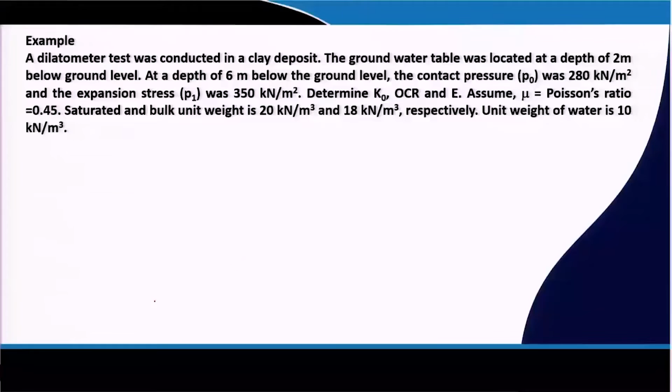So, last class I discussed the pressure meter test and dilatometer test. Now, this class first I will solve one example problem related to the dilatometer test, then I will discuss the other in situ test. A dilatometer test was conducted in a clay deposit.

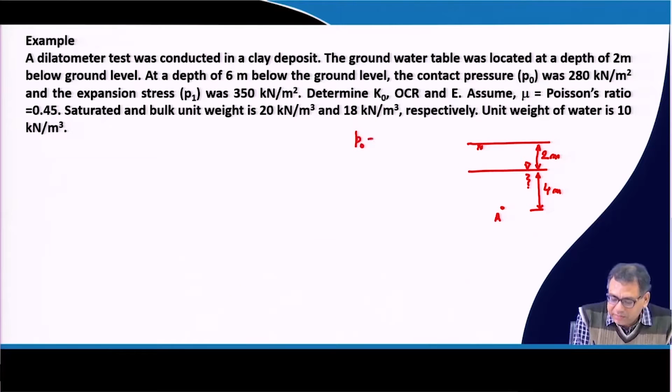Here P0 is given as 280 kilonewton per meter square and P1 is given as 350 kilonewton per meter square. Poisson ratio of the soil is 0.45, saturated unit weight gamma sat is 20 kilonewton per meter cube and gamma bulk is 18 kilonewton per meter cube. That means below the water is gamma sat and above the water is gamma bulk. Unit weight of water is taken as 10 kilonewton per meter cube.

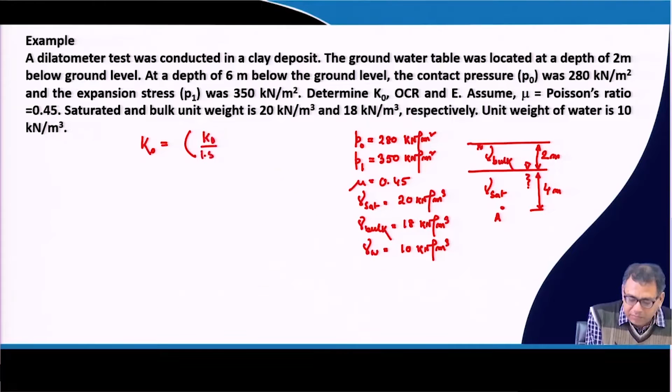So we have to calculate K0, OCR, and elastic modulus E of the soil. The K0 expression for clay is Kd divided by 1.5, to the power 0.47, minus 0.6.

The OCR expression is 0.5 times Kd to the power 1.56, and E expression is 1 minus mu square into Ed.

And Kd, because we have to know Kd and Ed, the Kd expression is P0 minus U0 divided by sigma V0 bar, the effective overburden pressure.

Now, sigma V0 bar at Z equal to 6 meter will be equal to, for the initial 2 meter above the water, 2 into bulk unit weight which is 18, plus 4 into 20 minus 10, because below the water table we have to take the submerged unit weight, sometimes called gamma dash, which is gamma sat minus gamma W. So above the water table use gamma bulk, and below the water table use gamma sub or gamma dash. Sometimes in the problem you may find that above and below the water table the unit weight is the same, so use accordingly. This value comes out to be 76 kilonewton per meter square.

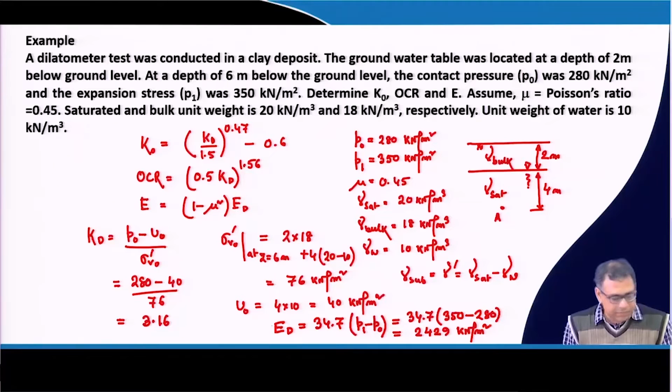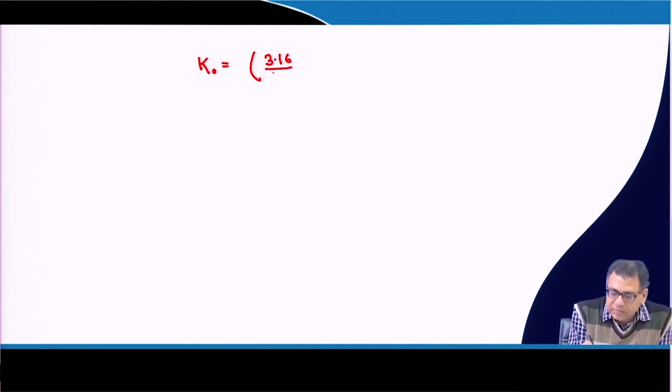Now we will determine the properties K0, OCR, E. K0 will be equal to KD, which is 3.16, divided by 1.5, to the power 0.47, minus 0.6. That is equal to 0.82.

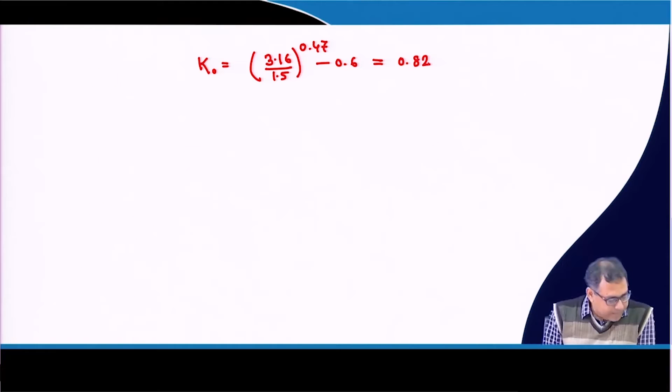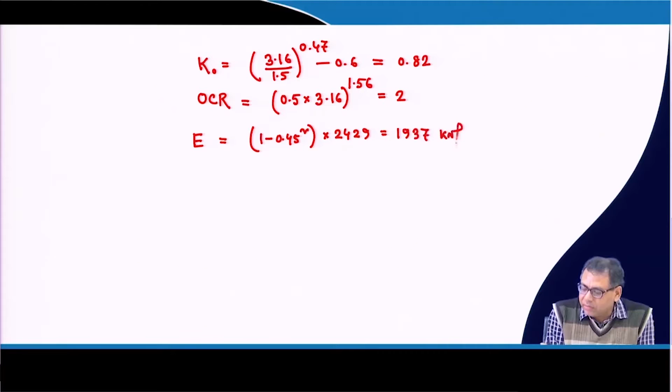And OCR is equal to 0.5 into KD, that is 3.16, to the power 1.56, so that is equal to 2. So OCR is 2. And elastic modulus E, which is 1 minus 0.45 square into ED, which is 2429, that will be 1937 kilonewton per meter square.

So this way we can determine the required properties if I know P0, U0, and P1, by using the effective overburden pressure. We get the required properties for the soil, and this way we can determine the other properties also, as I discussed in my previous lecture.

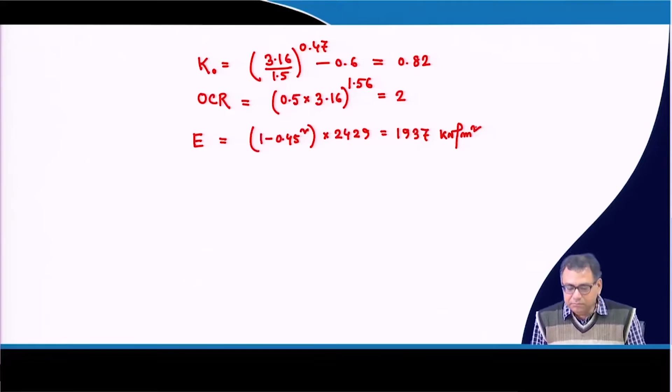Now I will go for the next test, which is called the Vane shear test. This Vane shear test is suitable for very soft clay. In this field Vane shear test, we basically apply a torque, and we measure the torque required to quickly shear the vane pushed into the ground surface or into the soil.

So that means we measure the torque required to quickly shear the vane pushed into the soil. That means the vane which is pushed into the soil, we have to apply the torque and we measure the torque required to quickly shear that soil.

Typical diameter of the vane is 20 to 100 millimeter, and the height of the vane. So this is the vane, these vane heights are generally 2 times of the diameter.

Height of the vane is 2 times of diameter of the vane. So once we apply this torque and measure it, and if we know the diameter and height of the vane, then by using this correlation we can determine the undrained cohesion of the soil, and it is basically applicable for soft soil.

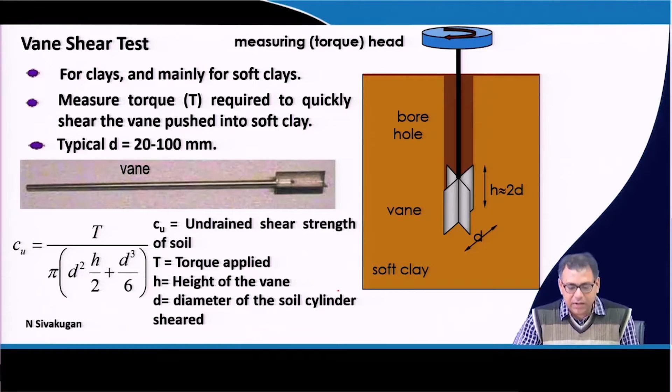So these are the in-situ tests by which I can determine soil properties, some directly and some indirectly. Now the next part, as I have discussed several times, if we require to collect a soil sample, we have to use the sampler tube.

Now the question is how we have to collect the soil sample. What are the different types of soil samples? There are two types: one is disturbed, one is undisturbed.

What is the definition of disturbed soil sample? The disturbed soil sample is one in which the natural structure of the soil gets modified either partly or fully during sampling. The undisturbed sample is one in which the natural structure of the soil is not disturbed during sampling.

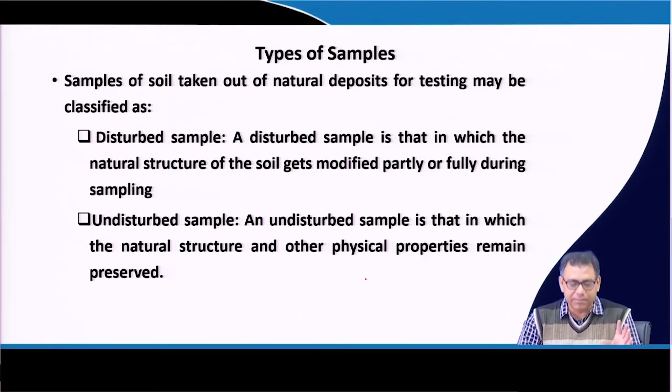Now, we also have to use disturbed soil samples. Where can we use the disturbed sample? The disturbed but representative soil sample can be used for grain size analysis, determination of liquid and plastic limit, specific gravity of the soil, organic content determination, and soil classification, because in these cases whether the soil is disturbed or undisturbed will not matter.

But the undisturbed soil sample must be used for the consolidation test, hydraulic conductivity test, and shear strength test - that means triaxial shear, direct shear, or UCS. We have to use the undisturbed soil sample because these data are required to design the foundation, for bearing capacity calculation, settlement calculation, and permeability.

Hydraulic conductivity test, or permeability, is also an important parameter, because consolidation depends on the permeability of the soil. So that means permeability, consolidation parameters, and strength parameters - these you have to determine by using undisturbed soil samples.

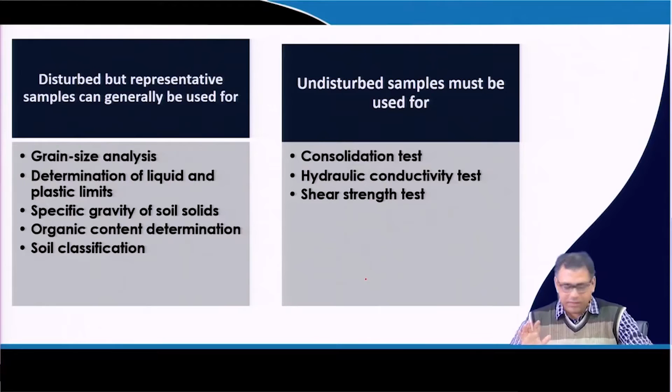Now how can we collect the undisturbed soil sample? What are the criteria? For the triaxial shear or consolidation test in the lab, we have to collect undisturbed samples. The criteria is that the area ratio of the sampler tube should be less than 10%. Now what is area ratio? It is expected that if the thickness of the sampler tube is more, then disturbance will also be more.

So the sampler tube's thickness will influence the disturbance. We have to make the sampler tube thickness as small as possible to reduce disturbance. The sampler tube is a hollow tube, so it has inside and outside diameter. The area ratio is outside diameter squared minus inside diameter squared, divided by inside diameter squared, expressed in percentage. If it is less than 10%, then the soil sample I collect will be disturbance free.

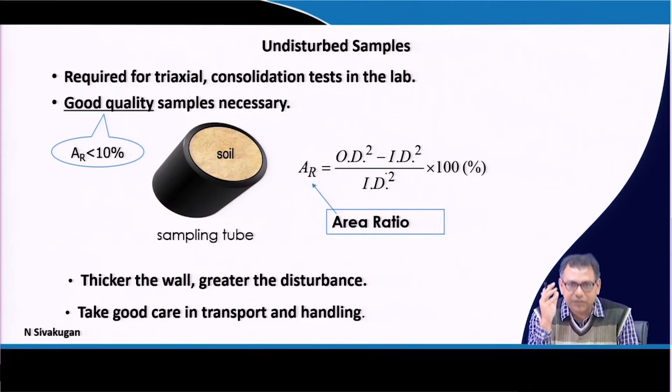We have to be very careful during the transportation of the sample also. Only the collection is not sufficient - we have to transport the soil sample from the site to the lab, and that time also you have to be very careful. Our IS code also recommends a few other criteria.

This is our sampler tube, and in the sampler tube there is a cutting edge attached at the front. So if the sampler tube inside diameter is D3 and outside diameter is D4, and the cutting edge inside diameter is D1 and outside diameter is D2, then I can get these values also.

Ci is the inside clearance, and using these expressions I can get Ci, then C0, and the area ratio also. According to IS code, for good recovery, Ci should be between 1% to 3%, C0 should be between 0 to 2%. Area ratio should not be greater than 20% for stiff formation, and for soft sensitive clay it should be less than or equal to 10%.

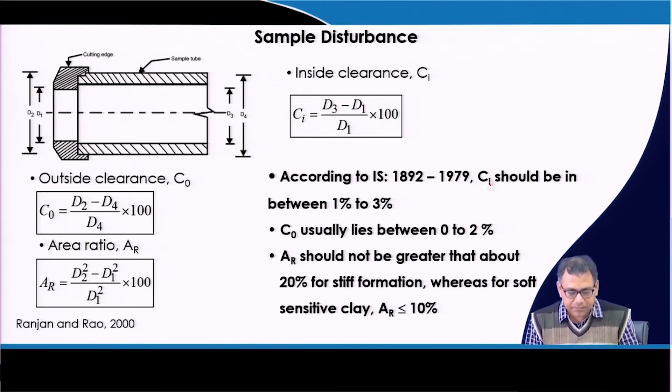By measuring the length of the soil sample, we can also understand whether the sample is disturbed or undisturbed. How can we identify that? We can identify it by the recovery ratio, which is LR, equal to the actual length of recovered sample divided by the theoretical length of recovered sample.

If the actual length within a sampler tube is less than the length of the tube, it indicates that the soil has been compressed. If the actual length is equal to the theoretical length of the sample, then the soil is intact. If the actual length is more, then the soil has expanded.

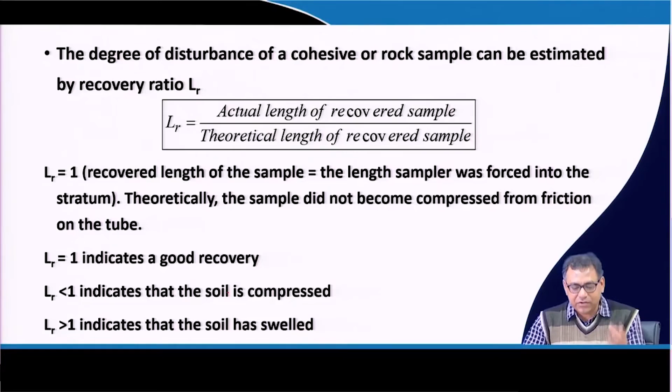If LR is 1, that indicates good recovery. Less than 1 indicates that the soil has been compressed, meaning the actual recovered length is less than the theoretical recovered length. If LR is greater than 1, it indicates the soil has swelled, meaning the actual recovered length is greater than the theoretical recovered length.

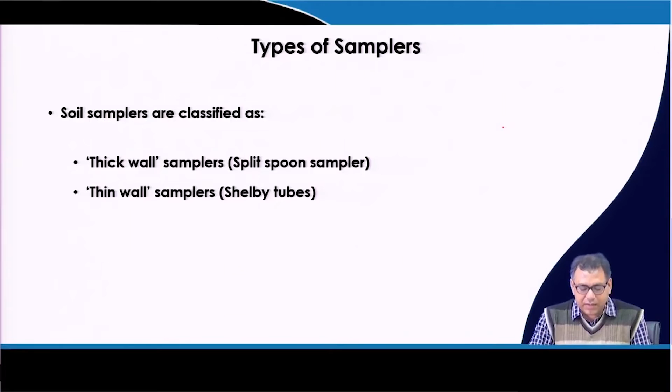Now, types of samplers: there are two types, thick wall samplers and thin wall samplers. The thick wall sampler is called the split spoon sampler, and the thin wall sampler is called the shelby tube.

This is the description of the split spoon sampler. There is a cutting edge at the front of the sampler tube. The split spoon sampler's inside diameter is 35 millimeter or 34.9 millimeter, and external diameter is 50.8 millimeter. The sample is generally taken at an interval of 1.5 meter or 5 feet.

This sampler tube has two halves. The sample sits inside these two halves, and these sampler tubes are pushed into the soil by hammer blows, and the soil is collected from the site.

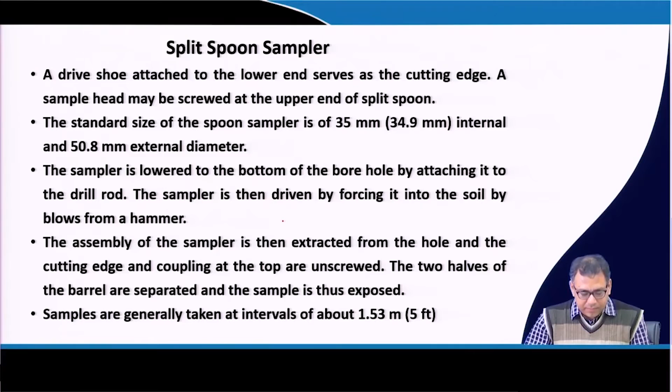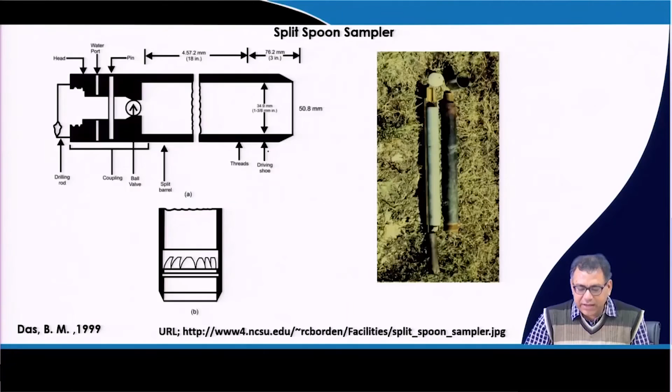These are the two couplings which are unscrewed during collection of the soil sample after taking it from the site. As mentioned, the inside diameter is 35 millimeter and outside is roughly 50.8 millimeter. So the area ratio will be 50.8 squared minus 34.9 squared, divided by 34.9 squared, into 100, which gives 112%. That means the samples we collect using the split spoon sampler are highly disturbed samples.

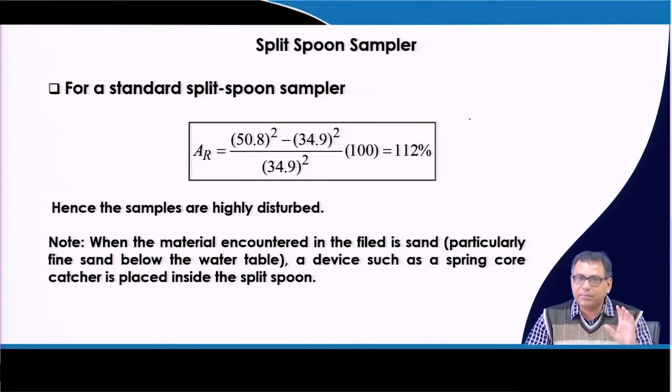Now for thin wall samplers or shelby tubes, there are two types: one with outside diameter 50.8 millimeter, another 76.3 millimeter. The inside diameter of the tube is 47.63 millimeter for the one whose outside diameter is 50.8. So the area ratio is 13.75%, which is close to the 10% requirement.

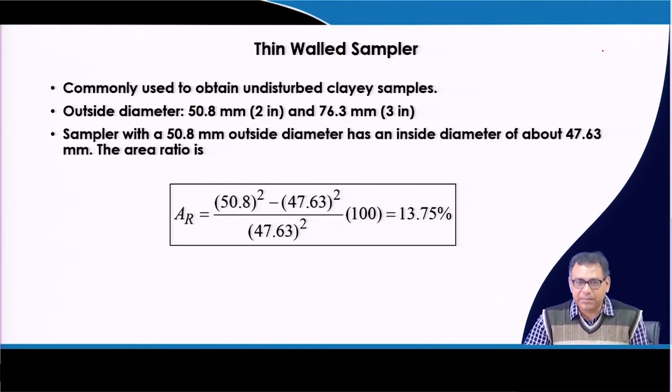That means if I use the thin walled sampler tube, the sample that I get is disturbance free. That means it is a good sample, or an undisturbed sample that I can collect. This is the particular sampler, the shelby tube or thin walled sampler tube, which is pushed into the soil to collect the soil sample.

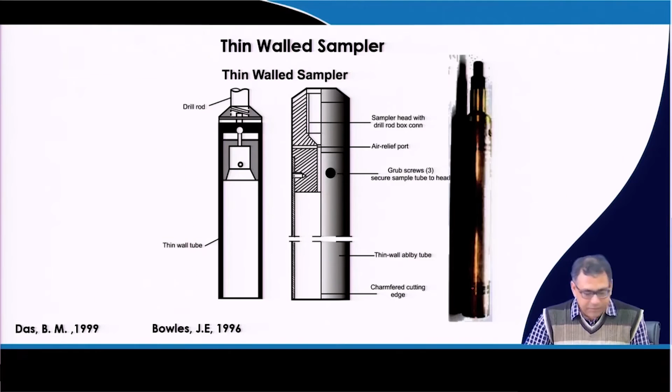Now, how many boreholes do we have to construct during soil exploration? That depends on the type and size of the project, the budget of the site investigation, and soil variability, which is very important. If there is huge variation of soils between two boreholes, we have to definitely take more boreholes between these two boreholes.

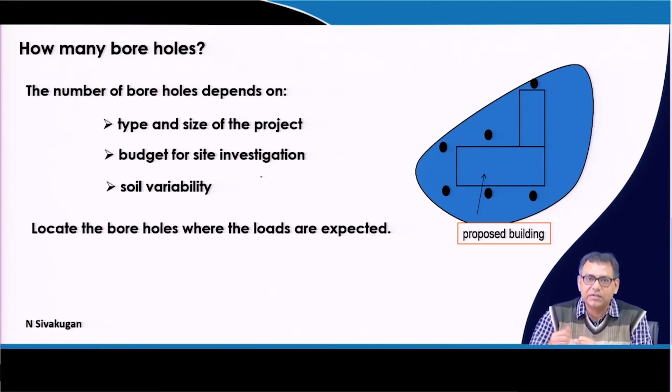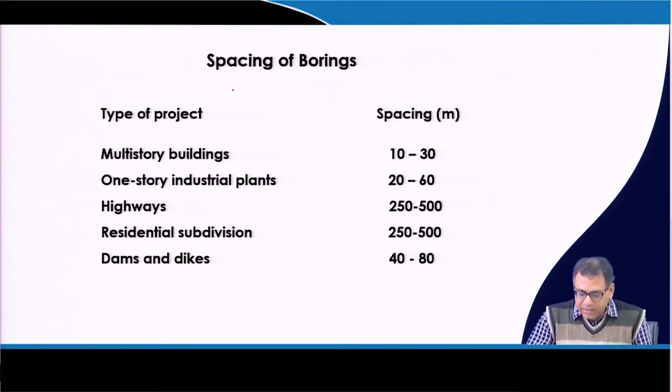These are some guidelines. The spacing of boreholes also depends on the type of project. For a multi-storied building, 10 to 30 meters; for one story industrial plants, 20 to 60 meters; highways, 250 to 500 meters; residential subdivision, 250 to 500 meters; dams and dikes, 40 to 80 meters. This is the spacing between boreholes.

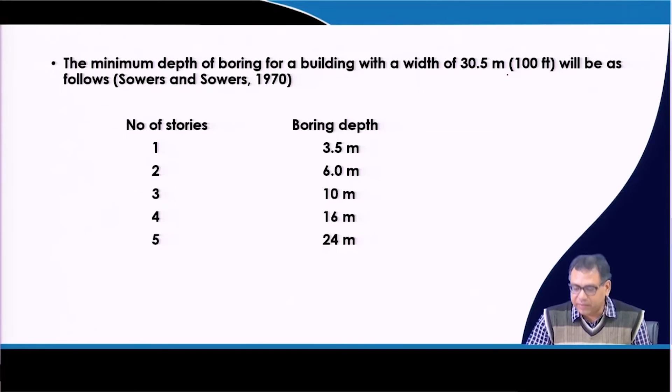Now, in general, for shallow foundations, for bearing capacity determination purposes, we go up to the width of the footing, and for settlement calculation purposes we can go up to 1.5 to 2 times the width of the footing. So for shallow foundations we can go up to say 2 times the width from the base of the footing as our borehole depth, up to which we have to collect the soil sample.

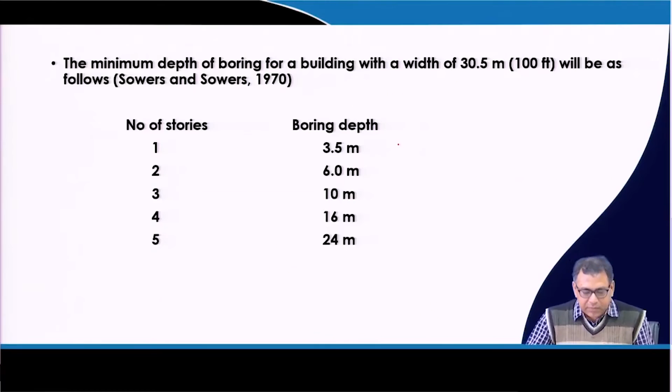So, next one is the groundwater table location. The correct indication of the groundwater table is found by allowing the water in the boring to reach equilibrium level. That means we have to construct a borehole and then see whether the water level is reaching equilibrium at what level.

If the soil is sandy soil, then the water level quickly stabilizes. Within a few hours we can identify the water level. We construct a borehole, put water into it, and it will quickly stabilize and reach the groundwater table level. So for sandy soil it will reach very quickly, but for clay soil it will take several days to reach that equilibrium or stabilization.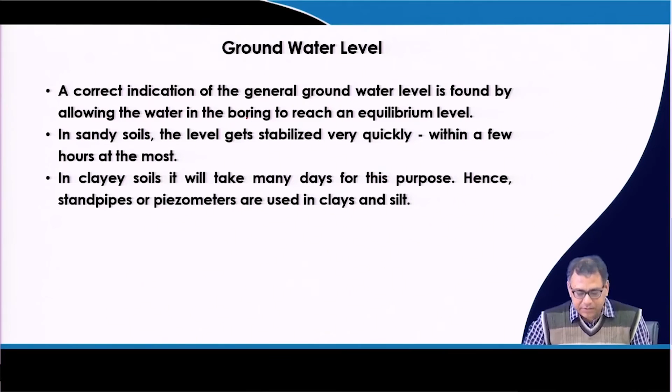For clay soil we have to use standpipes or piezometers to identify the water table. So for sandy soil we can identify the water table very quickly by borehole, but for clay soil we have to use piezometers. So what is the methodology by which we can identify the water table for clay soil?

This is the observation of water table by piezometer, for clay soil where if we put water into the borehole it will not stabilize very quickly. Suppose this is your standpipe or piezometer inserted into the borehole, and then we measure the water level at different time intervals.

So this is your borehole and we put the piezometer or standpipe into the soil, and then we measure the position of the water of this borehole at certain time intervals. First, we have to remove the water from this borehole, then this water will come into the equilibrium condition.

So it will take time for the water to come into the equilibrium condition. It will come at very slow intervals, it will take days and come at a very slow rate. But that change in water level we can measure by piezometer, and then by using expressions we can determine what would be the location of the groundwater table.

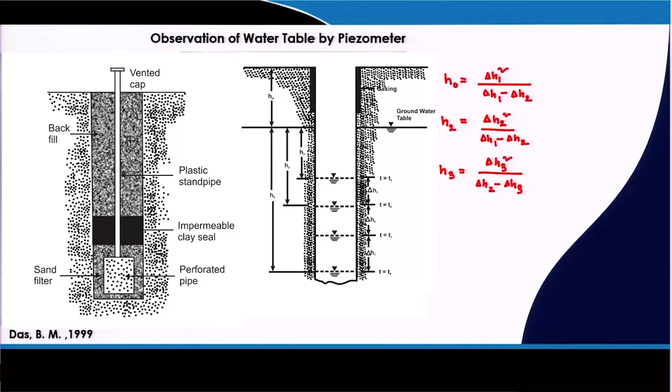I will discuss these things with an example problem in the next class - how I can measure this data and use it to identify the water table. So next class I will first solve one example problem related to observation of water table by piezometer for clay soil. Then I will go for the next type of soil exploration, that is geophysical exploration.